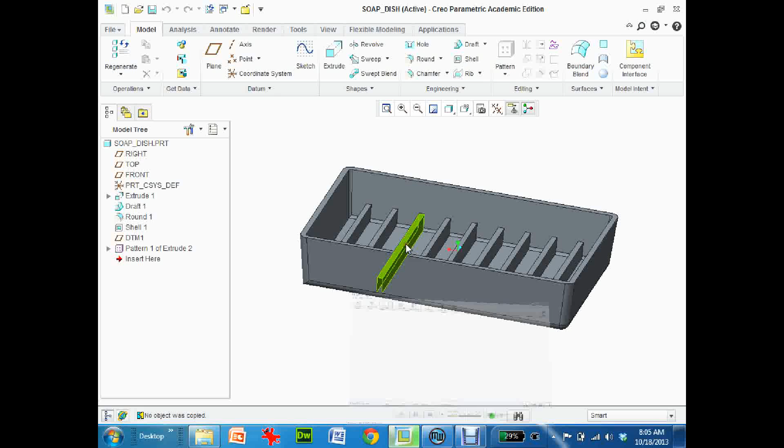This is a tutorial on how to go from Creo Parametric into MakerWare and then eventually to the 3D printer. So start off with, here's my soap dish that I created for tutorial 2, and it doesn't matter what part I use, it'll all be the same. So what I'm going to do simply is start off by saving to the right format. So I'm going to go File, Save As, and save a copy.

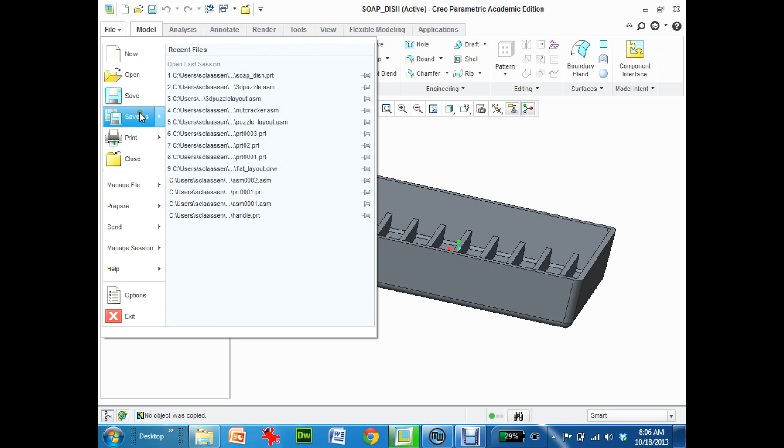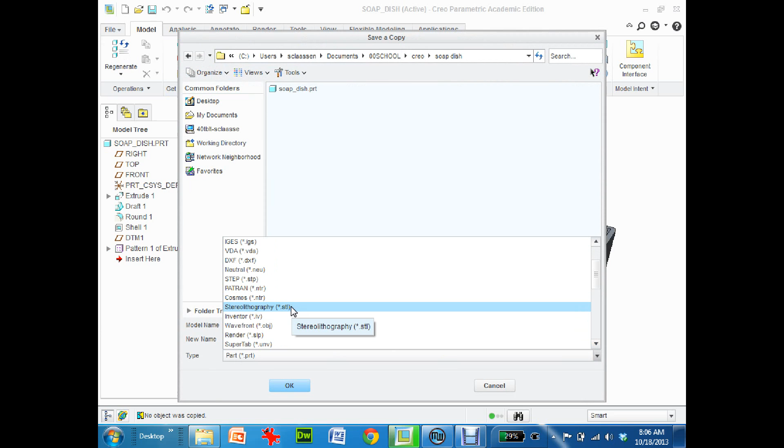And down at the bottom here where it says Type, instead of a part now, I'm going to save it as a stereolithography file, or an STL file, and that's the file format that the 3D printer likes. So click on that, click OK. What's going to come up is this Export STL dialog box, and under chord height, I'm going to change that to 0. And what's going to happen when I do that is Creo will automatically default it to the smallest number. When I click Apply, what you're going to see is a whole bunch of red lines show up.

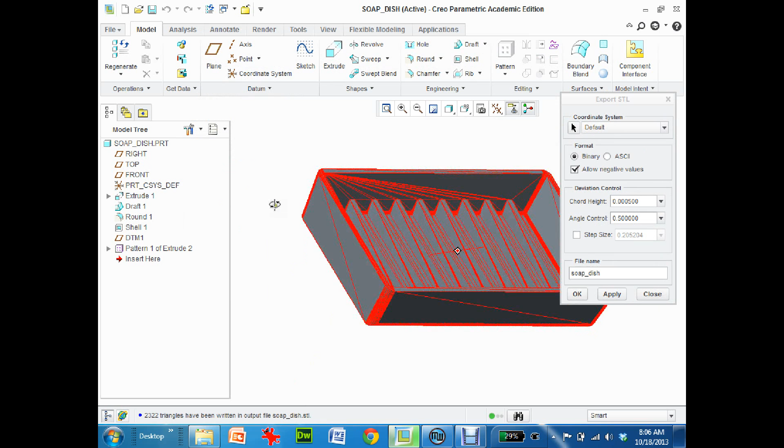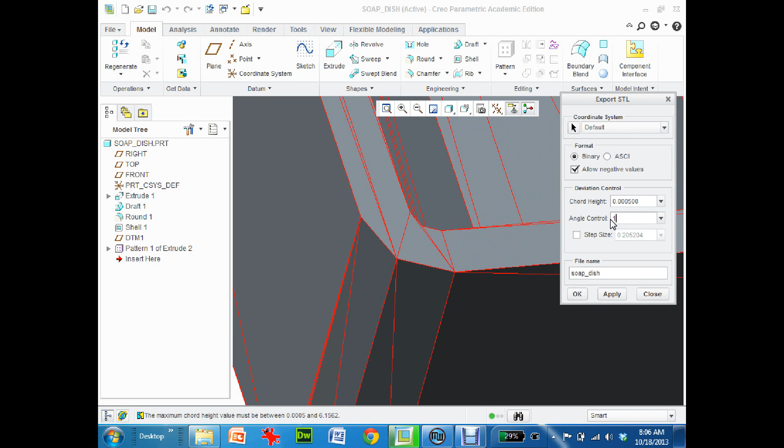Now if I zoom in, you can see here how it's a nice smooth round surface. If I change this chord height to 1 and I hit Apply, you can see how now it's a jagged surface. So if you're looking for something very jagged, go higher up, but usually you want something smooth, so we just default it to 0. The angle control is not as important, but just default it to 1. Okay, and I hit Apply, and when I zoom out, now I'm back to that. So that's basically all I have to do.

I click on OK, and I've just saved the STL file basically to the folder that I've created this in. So if I go to Soap Dish, on my network drive, I would go back to my documents, and in this case, I'm just going to scroll through this, School Creo, scroll down to Soap Dish, and you'll see my soapdish.stl, and there's my date that I just did it at the time.

Okay, now that I've saved it there, I can go to my MakerWare software, and I'm going to bring it in. So I can go to File, Open, or I can just go to Add. Either way, it doesn't matter. I'm going to go Add, and here's my soap dish that I did just a minute ago. Click on it, OK. Keep position, move on platform. So I'm going to put the object on the platform. You're going to see it comes in quite small. I drew that in inches and it came in millimeters. So what I need to do is scale it up.

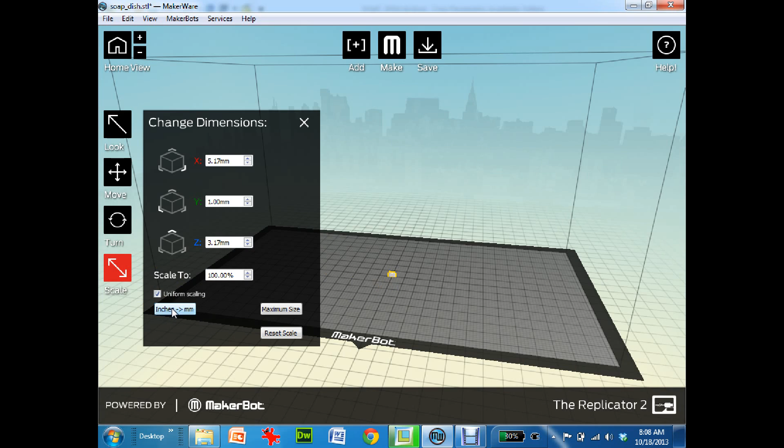So if I click on the actual object and scale, scale to 100%, uniform scaling, there's inches to millimeters. So I'm going to switch from, in this case, inches to millimeters. It comes up nice and big now. I'm just going to go up to turn, and I want to turn it so that this surface is flat. So I'm going to go plus 90 again. There, it's flat on the surface. And I also want to now move it back to on platform. This is very important because if it's not on the platform, basically you can't build.

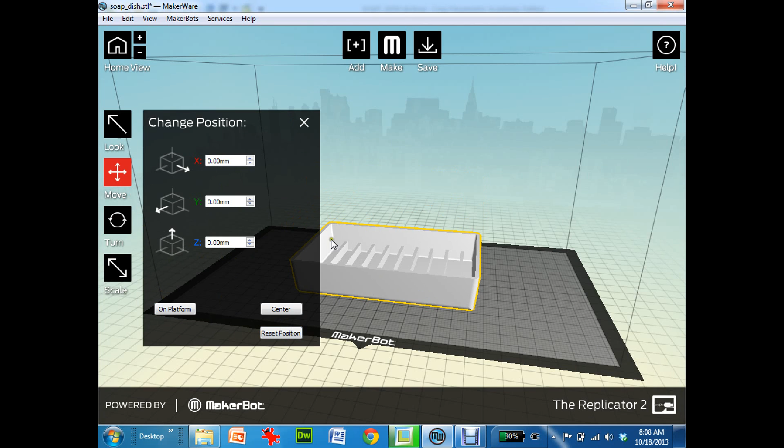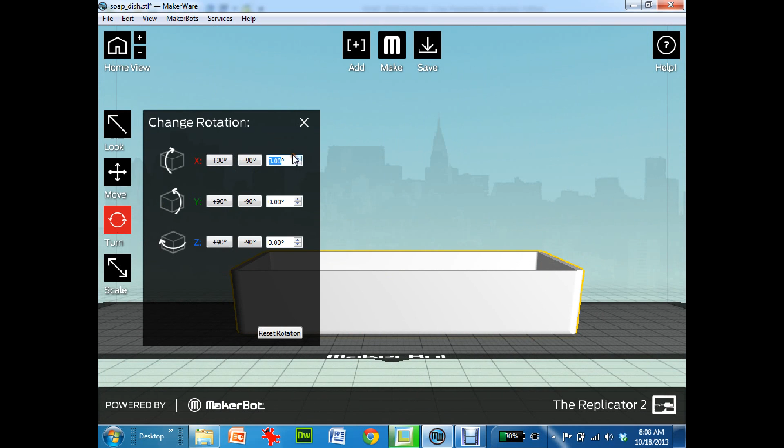Now, if I move this around, I'm going to look at the side view. And when I zoom into this, I want to make sure it is straight across so it's not up on an angle. And when I go to the front, same thing, I want to make sure it's straight across. What happens is some people will have it turned a tiny bit. So I'm going to go back to 0 here. I'll turn it this way. They'll have it turned here, and what you'll see is that it'll be down into the bed here and off the bed there, and that's not good because it can't print it out properly.

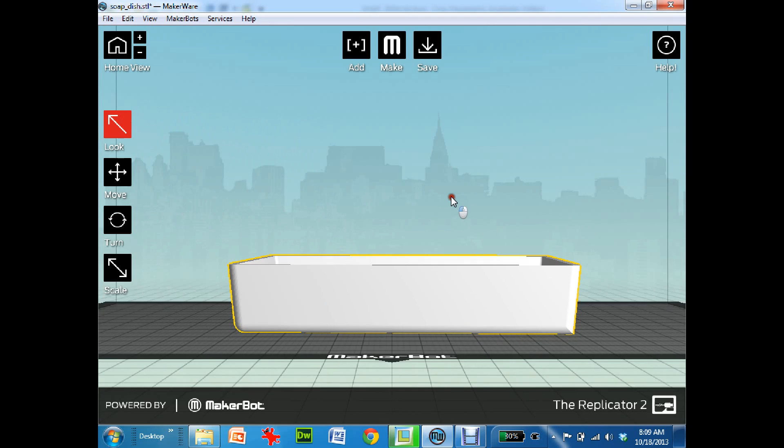The other thing that you might want to look at is how you actually bring this in. So if I go back to look, right now when a 3D printer builds, what's going to happen is it's going to start with the bottom, and then it's going to slowly build up layer by layer as it goes across.

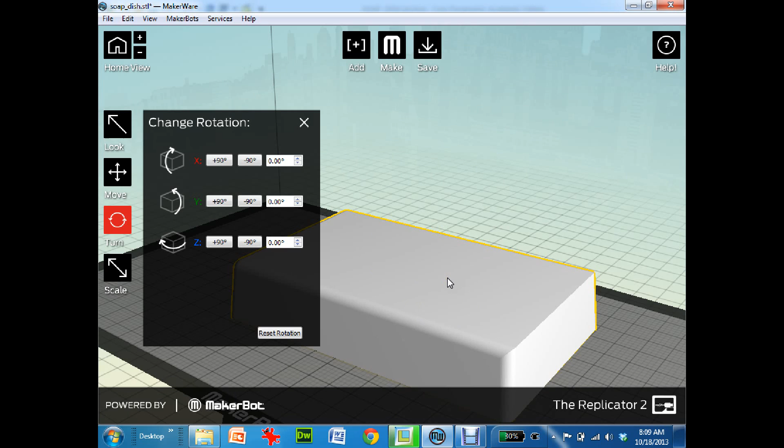If I was to have this turned 180 degrees, so let me just go like this, what it would do is it would build the inside, and it'd be in space, right? So it wouldn't build properly. So you've got to really think about how to build. Now there are solutions to that. It's called rafts and supports, but I don't want to deal with that right now.

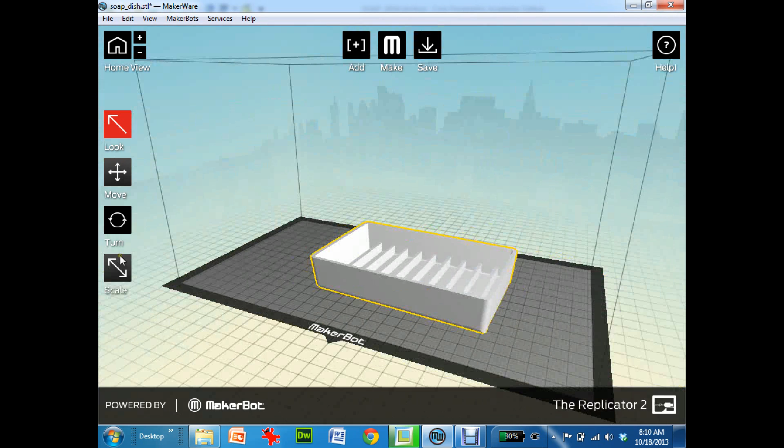So we'll start off with getting it back to the right spot. I'm going to go to Move, just ensure that it's back on the platform. Okay, it's on the platform, and I'm going to zoom out. Now, because this is full size, and I don't want it to take that long because this is just kind of a test, I can go back to Scaling, and under here you'll see Uniform Scaling is checked off. So that means that if I change any of these numbers, it's proportionally going to change the size.

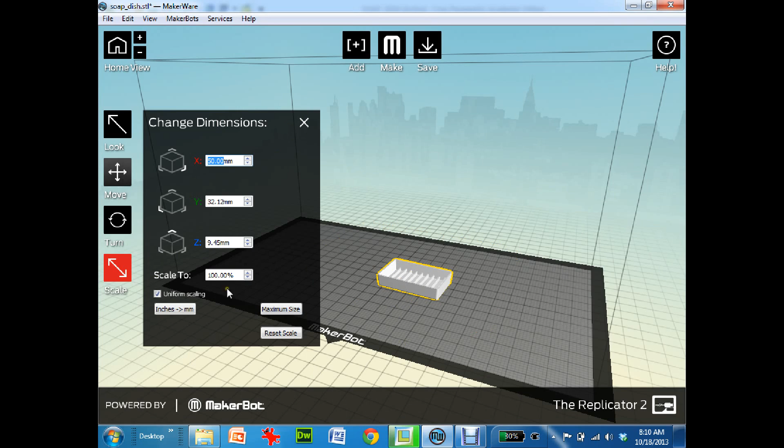So really, I only want this thing to be, I don't know, 60 millimeters, let's say 50 millimeters, which is approximately 2 inches. And then I just hit enter, and you'll see it'll automatically scale everything down. So now I've got it scaled to the right size because this again is just a test. I can hit close, and I go to Make. So under Make, Export For, and we have a Replicator 2.

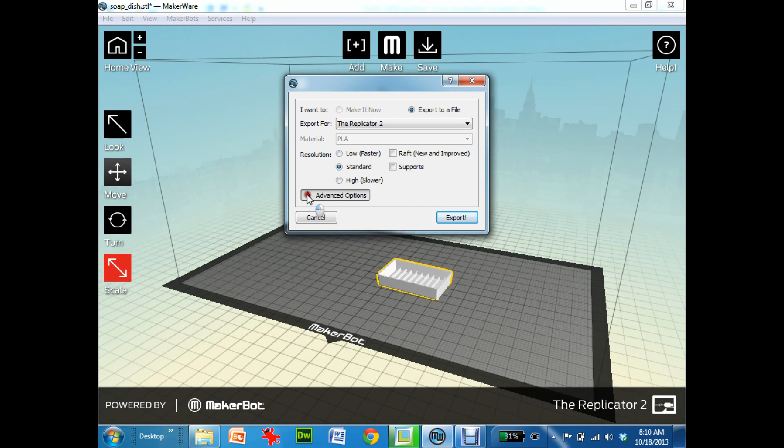And then at the bottom here, resolutions. There's low, which is the fastest. Rafts, we're not going to use rafts. Standard and high. And when I click on these different ones, high, standard, you'll probably get a screen like this. So I'm going to click on standard, and then all this stuff comes in. So quality infill. The infill is how much of the inside is actually either hollow or solid. Again, if you want something to go quick, you want a low infill, so like 10%.

Number of shells is basically how many times it goes around the outside for structure and strength before it starts to infill. So if you want something to print out quickly, keep it at 2 shells. If you want something a bit more strong, you might want to put it to 4 or 5 shells, not 45. Same as with infill. If you want a really strong, solid object, you might want your infill at 70%, but it's going to take a lot longer to build. So I'm going to leave the infill at 10%. The shell, I'm going to leave it at 3.

Layer height now. Every time you put down the PLA, the plastic on the 3D printer, it's going to take 0.2 of a millimeter, which means it takes 5 passes to get to 1 millimeter. So if you're wanting a really high-end quality project, you might move this to 0.1 or 0.15, but if it's just a test for a quick prototype, leaving it at 0.2 or even 0.25 will give you a quick result. So for this tutorial and for a soap dish for the class, leave it at 10% infill, leave it at 3 shells, and change the layer height to 0.25.

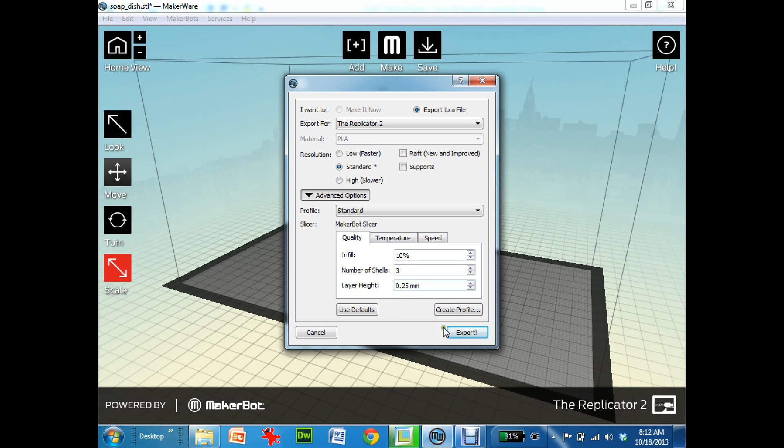Then we click on export. And now basically just save it to where you want it to go. So I have a thumb drive that you'll put into your computer, and you will save it to that thumb drive. Actually, it's the SD card that comes out of the machine, and I'll show that in a different tutorial. But that's basically how to go from Creo to Makerware to actually export.

So I'll just do the quick export, and I'll just put it on my desktop right now. I'll hit save, and you'll see down here it's going to slice. Slicing is basically its way of changing from the format that Makerware has to the actual 3D printer. And you see it's done, and everything's saved. So the next part of the tutorial will be actually using the 3D printer.